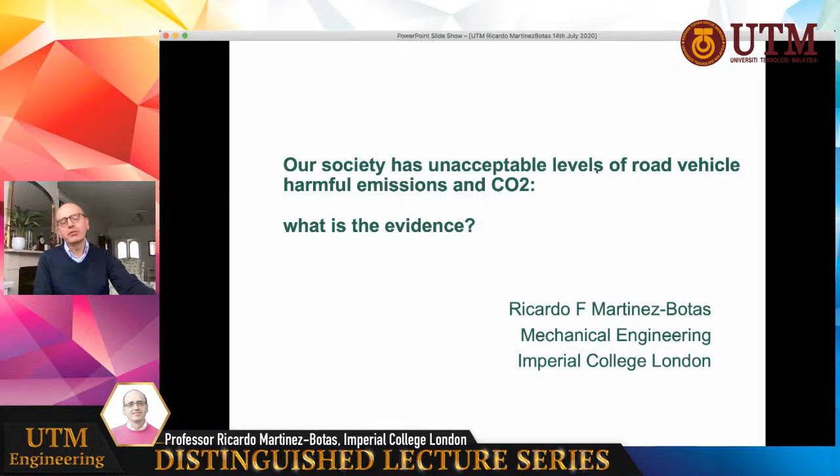And today I chose a topic which is entitled, as the Dean just told us. Really what I want to emphasize is what is the evidence behind our concerns when it comes to vehicle emissions, and what is the actual evidence that can support the policy of governments. That's really the major topic of today. And the topics I'm going to cover here.

I'm going to talk about vehicle emissions as the route to which we got, and where we are in regulations. I'm going to talk about the testing done on our roads in the UK. I was the overseer of the biggest emissions testing in the country, following the Volkswagen aftermath. So I'm going to spend most of my talk about this.

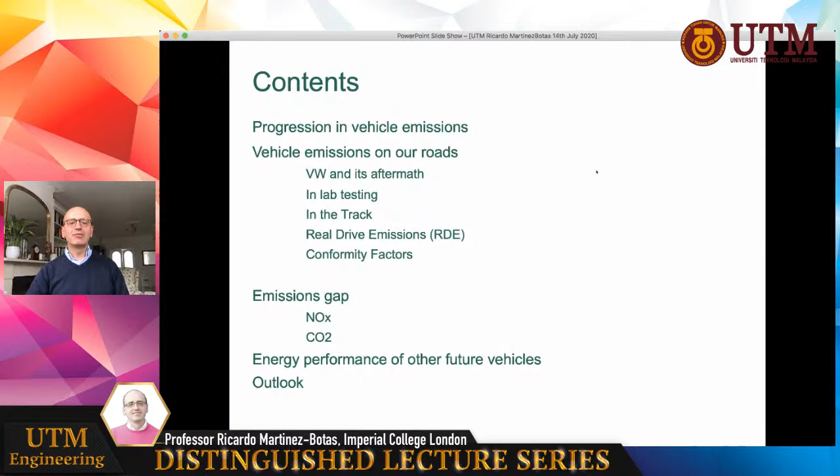I'm going to just show you the evidence. We're all engineers, or most of us are engineers and scientists. Hopefully there'll be some policymakers interested also in what I have to bring up. I'm going to spend most of the time looking at the evidence. Towards the end, I'm going to talk about the emissions gap, the gap between diesel-based NOx emissions as well as CO2 emissions. If time allows, I will look at the future. So this is my talk, and I'm now going to concentrate on two elements, mostly two types of emission levels, a lot about NOx and some about CO2 and contributions to CO2. Much of this translates to gasoline engines as well, and certainly all of it translates to heavy-duty trucks, buses, and other machinery on our roads.

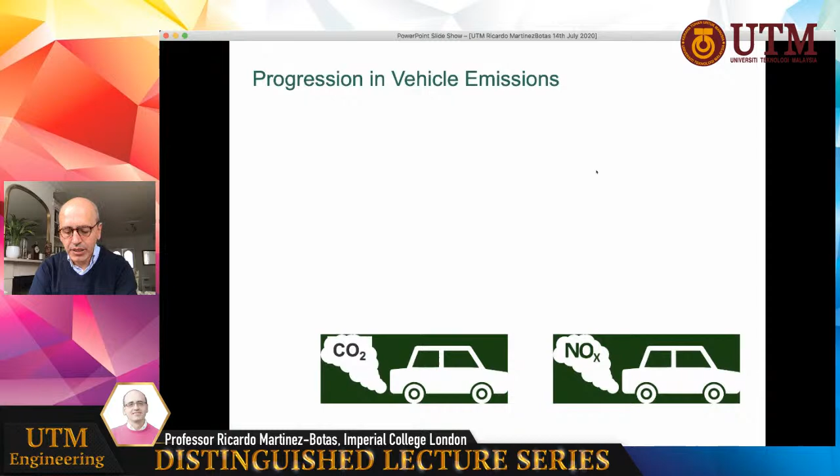So you can see from the UK national statistics of air pollutants, that is the kind of progression. If you start at 1970, we can see a substantial decrease from all emission levels. They're all centered at 100%, 100 units in 1970, and we can see how they project downwards. This is air quality in the country on average, and we can see all the emission levels going down. NOx dropped 69% in that period, from 1970 to 2014. Particulate matter, sulfur dioxide, non-methane organic compounds, ammonia stayed more or less the same. It was never really that high.

And so clearly we've made some effort. We made substantial progress in emission standards. Our air quality has got better, our pollutants have gone down, and mostly this has been provoked by regulation. This is where politicians, regulators, and air quality experts play a role. They play a role in sustaining a decrease that industry resents, because industry has a product to sell, a product to enable, and a customer to satisfy. So our regulations enable them to get better products, and that is costly and time-consuming. And so we see a substantial decrease in all air quality. This is just global air quality in the UK, as published.

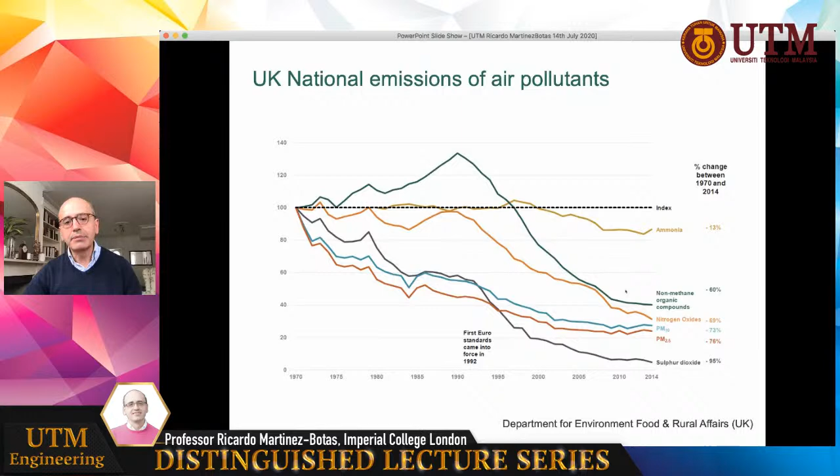If we look at emission standards from vehicles, on the top diesels, on the bottom petrol, we can see the Euro standards have enabled these changes. Just focus on a few of them, particularly NOx. You could focus on the others. From Euro 3, the NOx standard in grams per kilometer was about 0.5, and that's been reducing to get to Euro 6, which is around 0.08 grams of NOx, 80 milligrams per kilometer, and 180 milligrams for Euro 5. Equally, emission standards are of course much lower when it comes to NOx in a gasoline environment, but higher in other matters. So all in all, the standards have forced a change to the industry. We can see ourselves at Euro 5, possibly where Malaysia is sitting; Europe is now at Euro 6A, Euro 6B, now RDE, so even more advanced emission standard reduction systems.

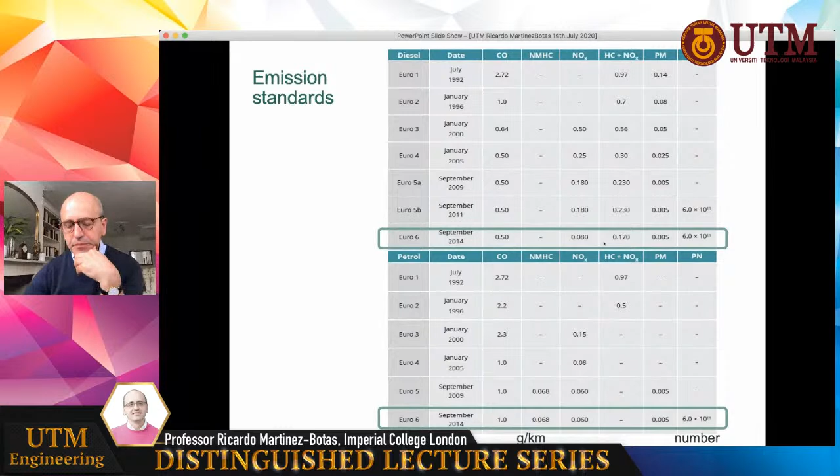If we then perhaps look at the improvements, let's look at the positive side before I tell you about the negative side of our air quality provoked by vehicles. The first one is here: the NOx limit of Euro 6 is 90% lower than 1992. So the reduction from that 1992 emission standard to today is about 90%. If you look at the difference between Euro 6 and Euro 5, Euro 6 is reducing that emission level by 44% relative to Euro 5. So it is worth going from Euro 5 to Euro 6 - it is a very substantial decrease of NOx and other emittents.

Meeting the standards in busy roads remains a huge challenge. In some areas, if you take big conurbations around the world, whether it's Kuala Lumpur or Johor, on a busy day, you would say that vehicle emissions account...

I was explaining how our emission standards have improved over the years, focusing on this 90% reduction of NOx since 1992 with Euro 6, and the difference between Euro 5 and Euro 6 is a 44% improvement. So it's worth going up to Euro 6 because you get a substantial benefit on air quality.

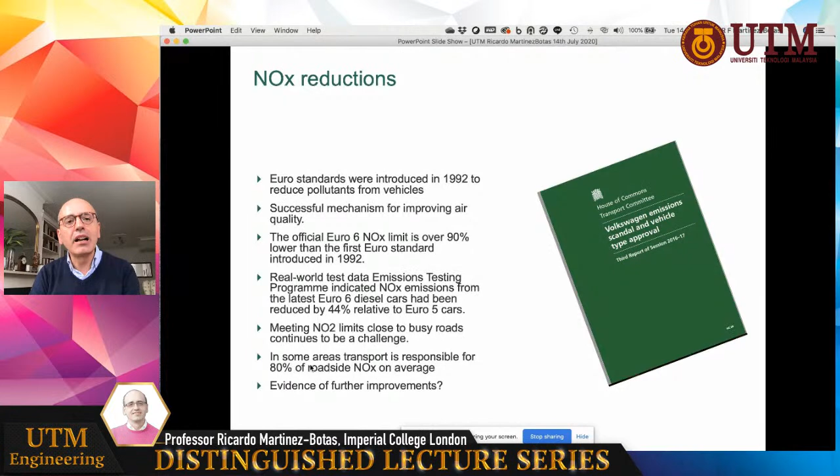Typically 80% of roadside emissions come from vehicles, and the remainder comes from other sources, whether tires, nearby industries, household emission flues, and local industrial sites. But 80% does account for our air quality's vehicle emissions.

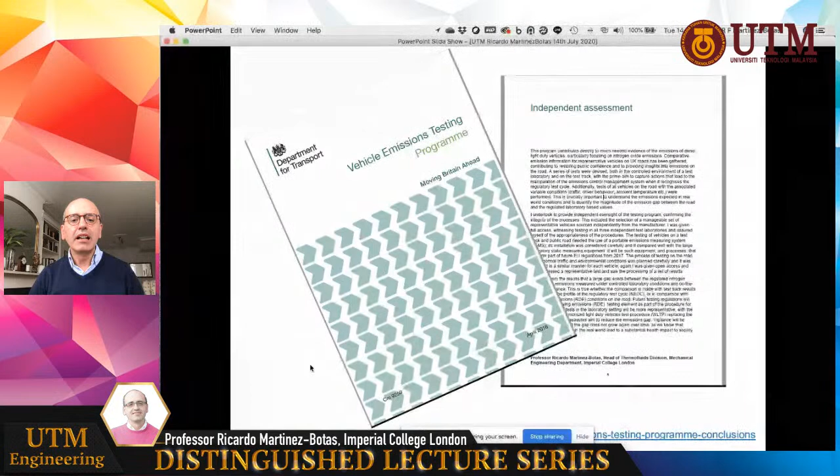With that in mind, we did a testing program and reported to the UK Parliament some years ago. This was the biggest program we've undertaken on vehicle emission testing, a substantial investment, and I was the overseer. I'm going to tell you today about this.

We urgently needed evidence on vehicle emissions. We looked at the world, published data, what we could ascertain, industrial partners and automotive companies, but none of those was sufficiently robust for us to take policy decisions. Whether it's a question of trust or of evidence, the fact is there was no evidence and no trust, and there still remains marginal difficulty in trusting our automotive companies, simply because of the aftermath of the Volkswagen cheating scandal.

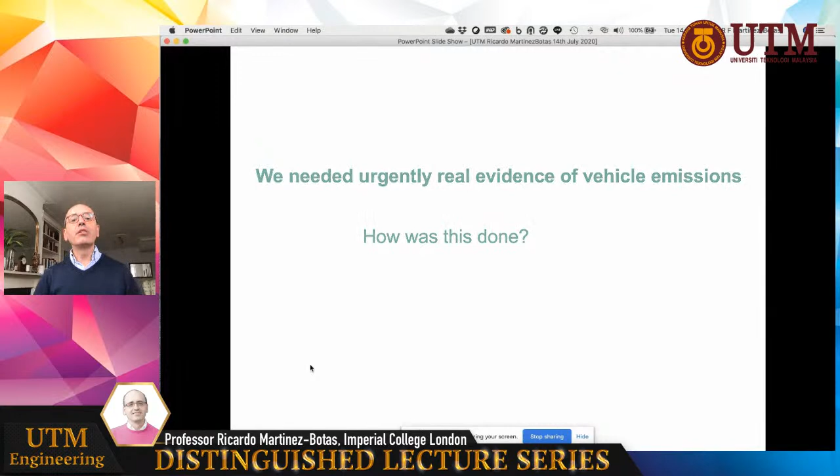So with that in mind, we needed to do something. Today I'm going to report on this and say how we undertook it. We looked at all the top-selling cars, trying to capture 75% of the top 70 vehicles, so we could capture a large proportion of all the vehicles out there.

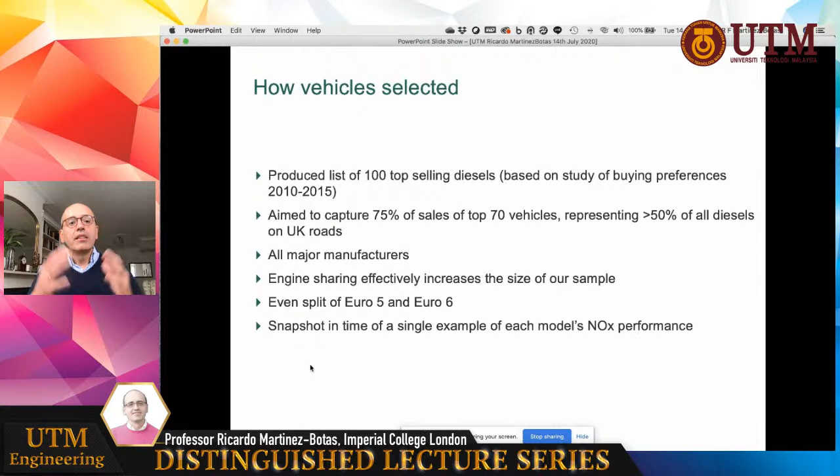For diesel vehicles, we tried to capture all manufacturers that are major sellers in the UK. Where sharing of a vehicle class or engine class was possible, we wouldn't repeat the testing. We had an even split between Euro 5s and Euro 6s, trying to get a snapshot of NOx performance. This major endeavor took the best part of 9 months, many tens of people, and lots of investment by the UK government, to produce a report that confirmed the difficulty in vehicle emissions as we see it today.

This was only a few years ago. I wonder if we did the testing today whether we'd see a substantial difference. I was commenting on how lockdown has changed this - lockdown since the 23rd of March or so in the UK, with a relief of lockdown in the last few weeks, has produced several effects.

The first is I can see the skies a lot bluer here in London - we're not quite in the middle of London, in Twickenham. If you're a rugby fan, you can see the Twickenham Stadium nearby. Second, we can hear the birds a lot more - in fact, they're singing louder than ever. The third thing we see is fewer cars and fewer scents and smells, which is somewhat different.

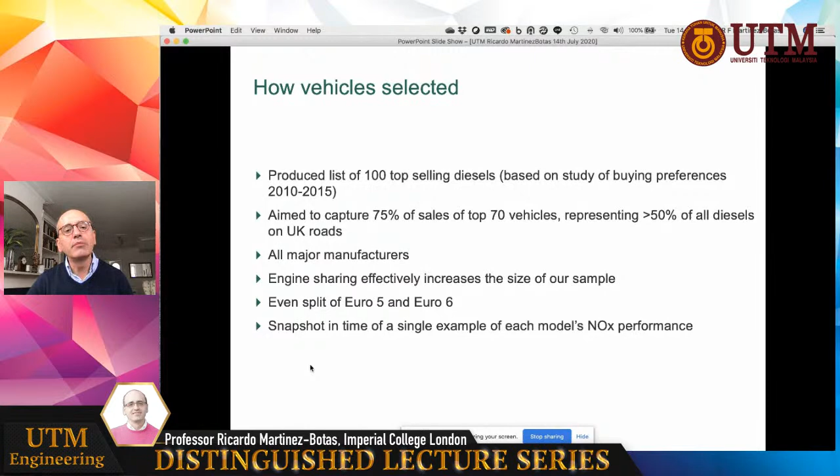Of course, the UK government is measuring standards during those lockdown events, which lasted many weeks. We'll have information showing that during this COVID crisis, the level of air quality in our cities, particularly London, would be at its lowest possible level, as there was minimum movement of vehicles on the roads and an extended period of no significant emissions. One would say that is the minimum standard. We'll see that in the next few weeks as our ministers look into it.

This was our methodology. We didn't want to interfere, intervene, or communicate in any way with the car makers, in case they provided us a car we'd have to question. So we sourced them from car hire fleets, many tens of vehicles, with no modifications or defects. They had to be under 30,000 miles, and we used the same grade of fuel for all. We undertook two tests with two pieces of equipment.

The first one is the standard laboratory-based equipment, which is large equipment, maybe occupying the entire size of my lounge here behind me, and it contains a dynamometer with 4-wheel drive and an investment of many millions of pounds. And that's how we would do the testing normally for certification.

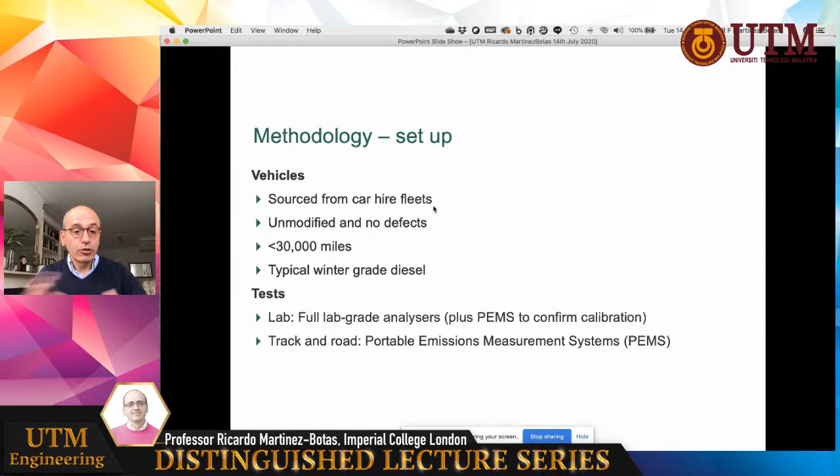The second way of doing it is we hired a PEMS, a portable emissions measurement system, which you will see a figure of in a minute, which we adapted and joined to the exhaust pipe of the vehicles. And then that was carried with the vehicle through the testing. So there were 2 sets of equipment, and the first one was on the dyno.

So this is a vehicle which was from the Volkswagen group, which we put into the standard vehicle certification procedures, and undertook the vehicle certification procedures as given at that time. And here you see on the right-hand side the speed trace needed.

So 0 kilometers per hour, 140 kilometers per hour, and it's the faint gray line, which I'm going to trace with my mouse. This is what the dyno, this equipment, will be doing. It will force an acceleration and deceleration following the gray trace at lower speed, and finally mimic a high-speed drive on a motorway over 1,200 seconds.

That is basically how the test was done up to that point. A car will be taken into the lab, will undertake this sort of testing in a certification manner with an independent overseer, and they will say, yeah, it meets the standard.

So here is meeting the standard for NOx, the red line, or rather orange-looking line, quite low because it's low speed. And when it gets to the spiking, or rather higher speed trace, 100 to 120 kilometers an hour, motorway mimicking, there will be a bigger NOx impact.

What we did is we simply took the vehicle and then slightly modified the testing by putting the high-speed element, the fast element, ahead of the slow element. So we just modified our testing procedure and said, right, let me take the lower speed later, and let me take the high speed earlier.

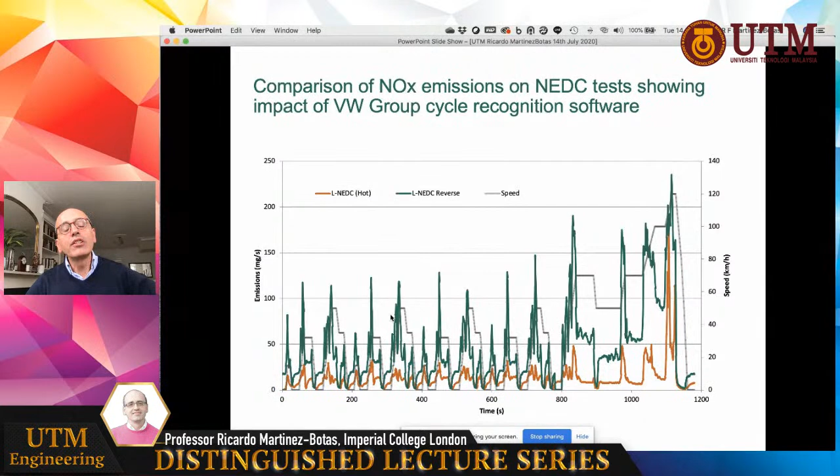Okay, one can argue endlessly over this matter. So then we said, right, if we now take a different Volkswagen Group vehicle which does not have the recognition software, well indeed, it doesn't make a difference whether you go forward or backwards. Green and orange are approximately the same, rather low.

So that, of course, told us that there were vehicles out there that would be cheating. Now, the question was, relevant to our seminar today, whether there was any other vehicle testing that we tested with similar software recognition in it. And there weren't any. Of all the plethora of vehicles we tested, there were none.

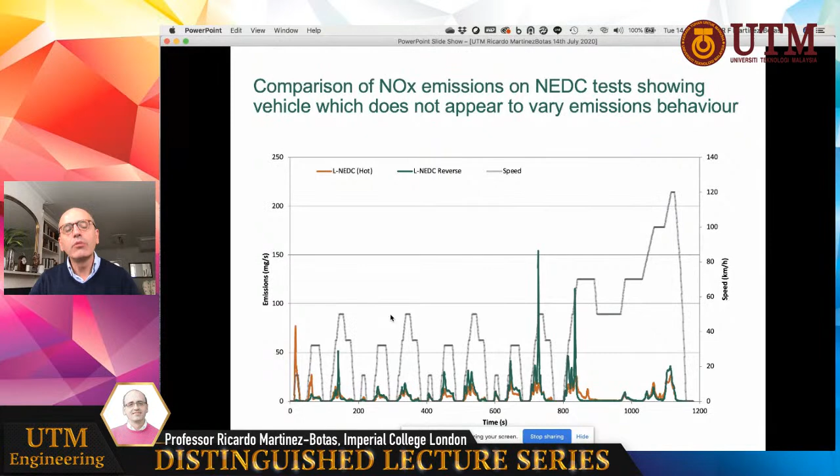So we leave Volkswagen to one side for now. We did our job. Our job continued because, of course, we wanted to know what is the real level of emissions, what is the public exposed to. Why I say our cities, our environment is not a good place yet, and why we're having such enormous pressure to electrify, to get rid of, to remove, make obsolete our internal combustion engines.

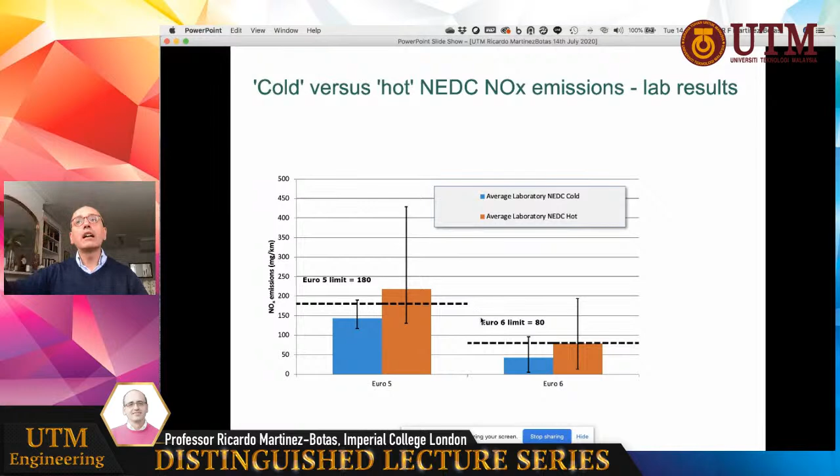When we look at taking those vehicles on the road, a different thing emerges. Before we do that, let's do another experiment. This is a second experiment we undertook. We said, right, let's get our portable emission testing procedure, put this piece of equipment on the vehicle, connect it to the tailpipe, and now undertake the same cycle we undertake in the laboratory with dynamometers and rollers moving the vehicle, but we're going to do it outdoors.

We're going to go to MIRA, a beautiful place in the UK, a beautiful track, mostly done for sports as well as certification, and take the vehicle around the track following precisely this schedule. For 100 seconds we're ramping up in acceleration to about 50 kilometers an hour, and so on and so forth.

I witnessed this, and there was a highly experienced driver following a digital meter, accelerating and decelerating with some precision, almost total precision, to this schedule. Now you would ask, should there be a difference between outdoor and indoor testing? Well, there is some difference because there's an environment around you which is different, some cornering happening on the track, not a lot because you can see those straights. There could be some additional reasons, but in principle there should be no fundamental difference.

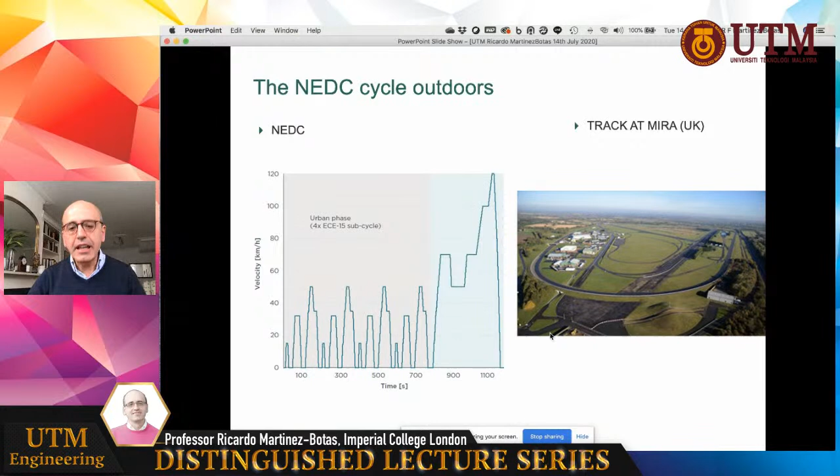And yet when we did the testing, we found this, and we're going to drill down a little bit more. We found that on average, the average emission was by no means anywhere near the emission average here in orange compared to green, whether it's Euro 5 or Euro 6. So the average on the lab and the average on the track were massively different.

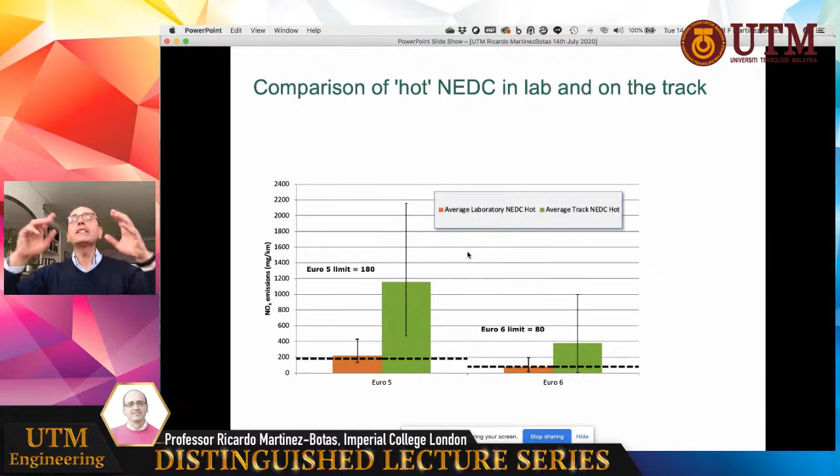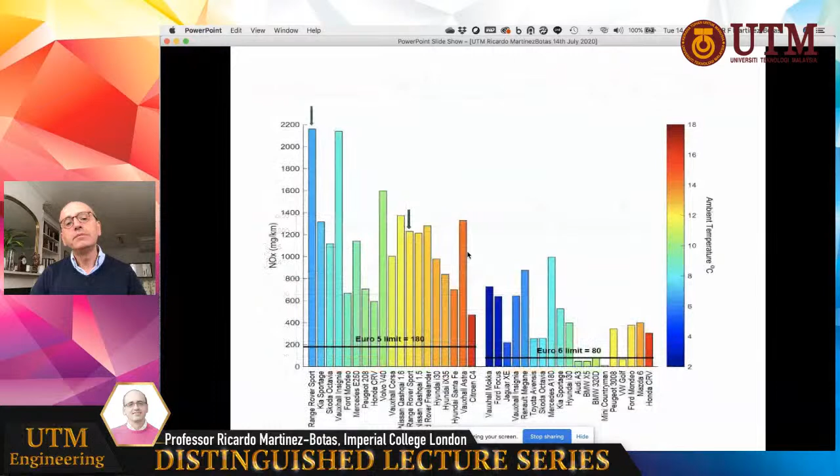Now, if you look at it as an automotive engineer, you'd say I'm undertaking the same trace, the same similar situation, and yet I'm experiencing something a lot bigger on average. Specifically, if you look at specific vehicle classes, the standard they all met on the lab was 180, slightly below, but when it's hot, maybe around 200, when the engine was hot and it was properly done with a fair-to-fair comparison, or 80.

There are no vehicles on Euro 5 that meet that standard. There's some vehicles in Euro 6 that did meet it. They're all well above, and some are at 2,200 - the Range Rover Sport, a previous version to the current Range Rover, it's got better, I must say. Look at that level, or the Vauxhall Insignia, which should be meeting around 180. And the Vauxhall Astra and the Citroën.

Well, I don't want to pick any manufacturer, although I am doing that because it's public domain. And then another Range Rover - two Range Rovers performing rather differently. There is an effect of temperature here in this bar chart. Without paying much attention, there is a bar chart indicating whether it's hot or cold.

Generally, the colder the day, around 6-7 degrees in winter, or the hotter day closer to 15 degrees, there was some effect of air temperature. So it appears the engine system knows air temperature, and it would adapt the exhaust gas recirculation system, the EGR, to adapt and stop it.

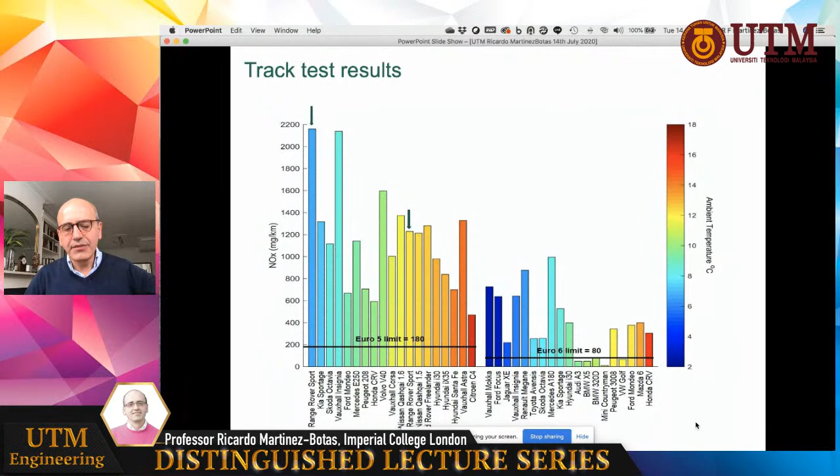The moment the EGR is switched off, vehicle emissions will go substantially higher. So why would there be such a massive difference between what was similar testing? It's unclear to some extent. What I can tell you is here is the equipment, the big laboratory equipment, where they connect the tailpipe to an analyzer.

It's several cabinets big, and millions of pounds. Here is the PEM system connected to the back of the car with a tailpipe, and then an exhaust will be here. It's all done equally, to be fair. Trust me, this was done properly for many tens of vehicles.

And this is the track. Well, first of all, the car on the track has an aerodynamic effect that is not as visible in the dyno. The dyno does know the aerodynamics because it has a CD, a coefficient of drag, that sets the dyno wheels to be mimicking. But there is some effect.

I think when testing, often vehicle developers have used the concept of flexibility. They've used the most favorable condition, and maybe it is the most favorable condition of those coefficients, and therefore the best outcome. The test temperature was different, I mentioned. The weight is slightly different, cornering is slightly different, and there may be some slight difference between the emission equipment. In fact, equipment was compared back to back. It was pretty good. So I think, in fairness, aerodynamics and flexibility are the two biggest differences.

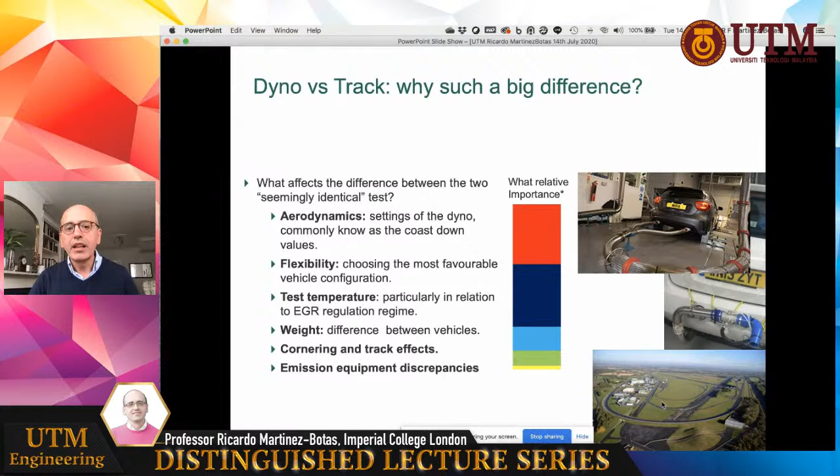So we then wanted to do representative testing. This is a bit like a story. The story says we're going to do real drive emissions. We're going to take the car. Here is the Fabia Skoda TDI, and we'll take all the tens of vehicles, in the real environment, not a test track. This is near Nuneaton in England, and we took the cars.

I only witnessed it, I think, twice, and we did a whole journey, which I'm just imagining by that trace. That journey was 1.5 hours of continuous driving, with real environments including traffic, pedestrians, traffic lights, high speed on the motorway with joining lanes and other vehicles. It included the prescribed urban, rural, and motorway portions, about a third and a third and a third, not far off. And it reverted back to Nuneaton, where the system was checked and disassembled, ready for the next vehicle, and that was done for each and every one of those vehicles.

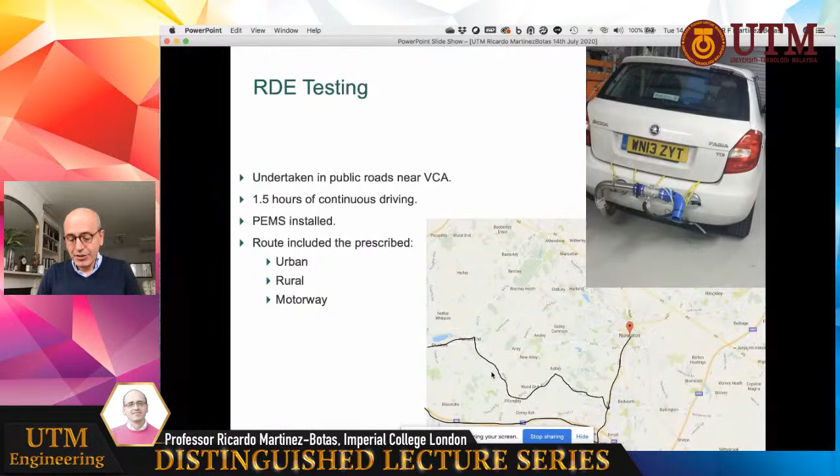And so that is the closest you could say one can come to real life, right? So if it's the closest we can come to real life, what was the outcome? Let's take Euro 5. Euro 5 is similar to Malaysia, so you shouldn't be terribly happy with your own vehicle levels, because I think they're substantially higher than they should be. When undertaken for all these vehicles, and the names and models are there, well, if the standard was about 180-200, the average on the road was bordering 1,200 milligrams per kilometer.

And all the other emissions will follow. So in other words, no matter which one, some are massively higher. I already mentioned the Insignia, Range Rover Sport, and a few others, Hyundai Santa Fe, there's a few others. And some rather good ones, you could say the Citroën C4, Peugeot 208, and some rather good ones and not so good ones. No matter what, 1,150 milligrams per kilometer, that is the average emission over a 1.5 hour drive.

And what is the point of regulating for 180? There is a point, because the next slide will show you why there is a point of tightening it. If you look at the Euro 5, Euro 6s, these are most relevant to us. Do remember that most of these vehicles are still on the road. Do remember that it takes about 10 years or so, depending on the nation, to have a substantial turnover of vehicles. So no matter what, these vehicles are today on the road.

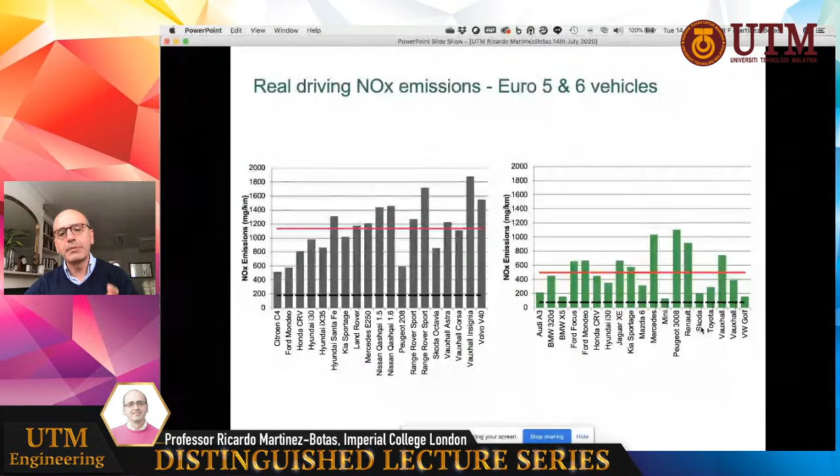This is better visualized by the next graph, which is rather complex - I've only taken Euro 6s here. What I've done is taken the ratio of what they delivered on the road to what they should have delivered, or rather what was regulated in the test environment in the lab. So where number one is parity - any vehicle that makes 1 means it's emitting 80.

This is how Euro 6b, Euro 7 will be saying we want to develop a conformity factor, a CF, and we set a number. You can see that if we were to apply any conformity factor to these vehicles, only 3 meet anything less than 2.1 - 2.1 being a possible number. The BMW X5, the Mini Countryman, and the Volkswagen Golf. The others are not just 3, 4, 5, 6, 7, but 10, 12, 13, 14 times what they should be. The average conformity factor of these super advanced Euro 6 vehicles is 6.2. And that is the evidence we needed to say we are not getting to the standards we would like our nations to be.

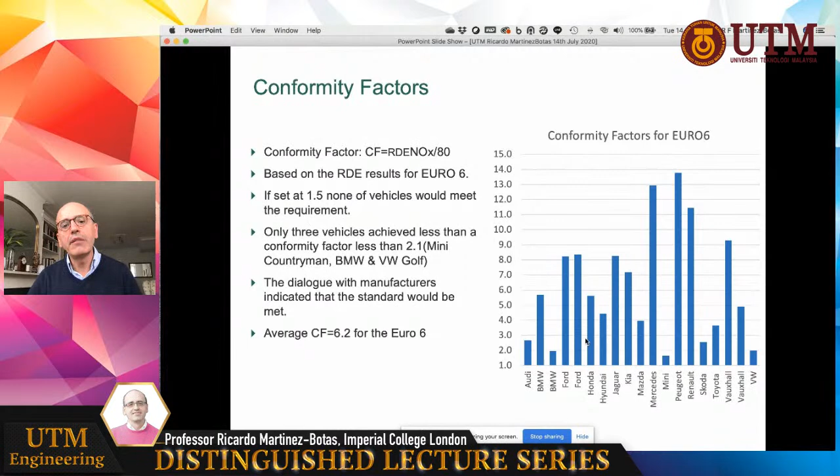So the evidence is astoundingly bad.

The interesting thing about this - I made a plot here as I come towards the latter part of the presentation, conscious of time - is that we did something rather naughty. We plotted together the real drive for all these vehicles versus the simulated track following a very, very tight prescribed speed trace. And these are very different things.

On the track, you're prescribing without traffic, without pedestrians, without traffic lights - a very precise, very tight testing procedure. On the road, you have the day change from morning to evening, though it's usually done midday - we did it at midday. There's also traffic, traffic lights, pedestrians, acceleration and deceleration, and the ability to just drive, because they're all different drivers.

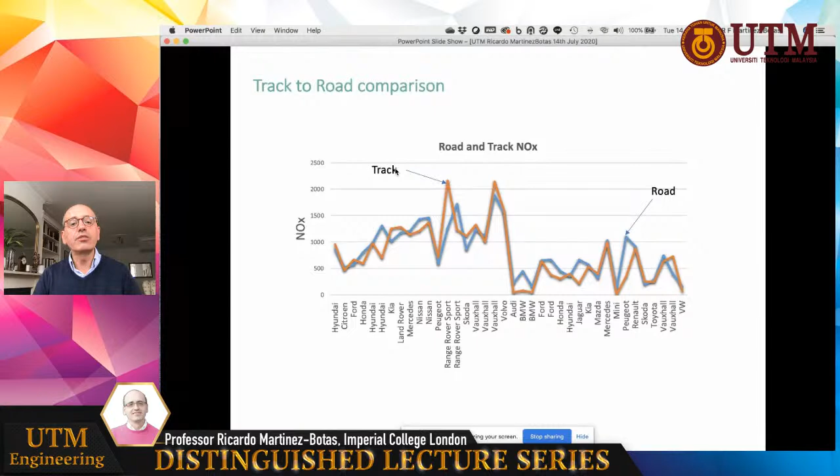Now, there'd be absolutely no reason why these two should be correlated, and yet the evidence shows the strongest correlation. So clearly, the way our diesel technology is enabled is not capturing the reality of emission levels. Whether you do a very narrow, tightly controlled test on the track, or you do 1.5 hours with real traffic, the numbers come up almost the same, which is rather shocking. This is to do with the way the emission equipment is enabled.

Now, in some cases yes, in some cases no. And the evidence is strong for the latter than the former. The evidence is strong to say that observation I had a minute ago is not in line, and is not in line in magnitude with what needs to be done to protect it.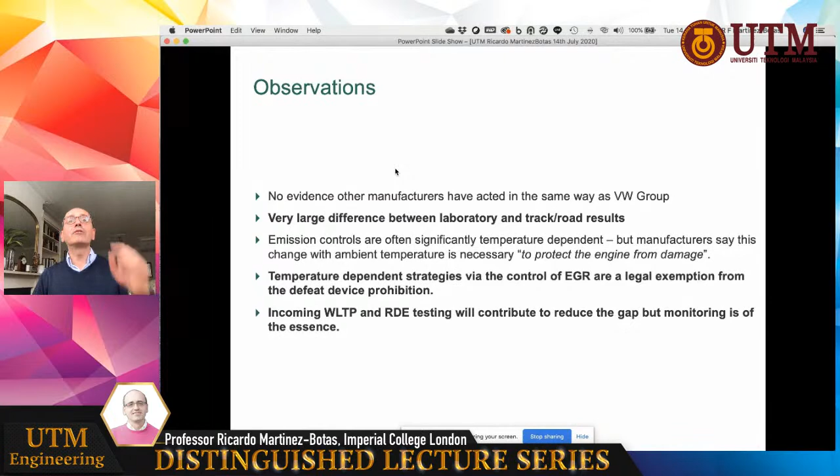The last part of my talk, as I come towards the end, is to discuss the emissions gap. The emissions gap is to do with the following: if we have a technology through which we improve it, and in that improvement we get our emissions lower, is it possible, or is there any evidence that emission levels in real life get worse? In other words, you regulate something which is in a tight environment of testing conditions. Does that mean you might increase or decrease your outdoor real drive emission output?

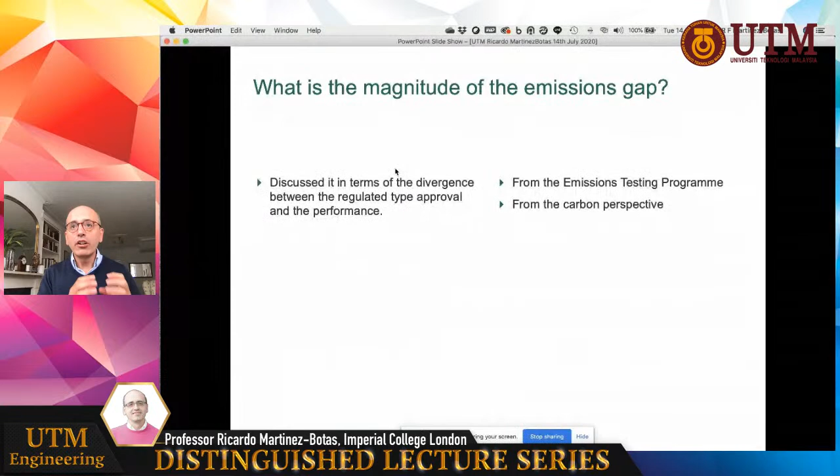You would say that if you regulate something to lower emissions, you should be able to lower also the level of emissions on the road. So divergence will mean that while you get a benefit in a tight testing environment, you're not getting the equivalent benefit in real life, if it's a divergence in the negative sense.

So there has been some divergence, and we better acknowledge that. We got better, everything is better, but the divergence relative to what we should be meeting, which is a better standard, on the road has increased.

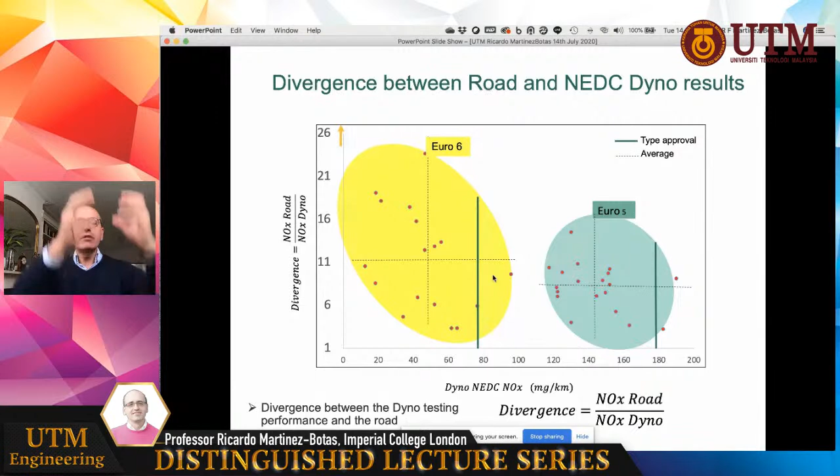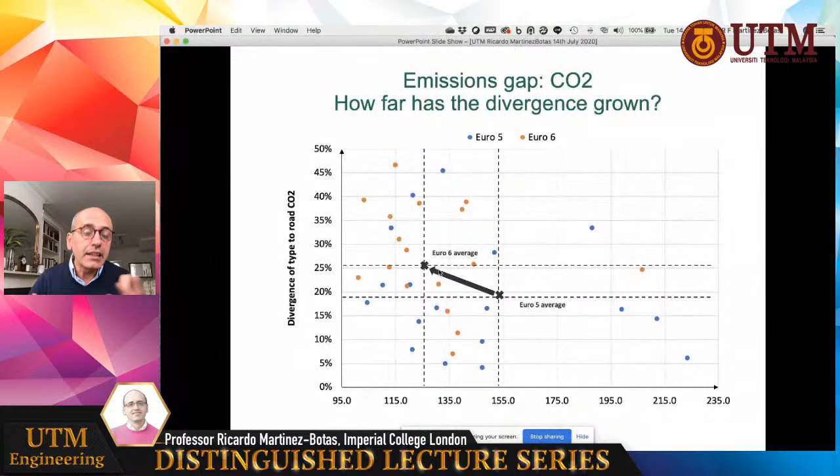If we take 'should have' as a strong word, which is not legally binding - so you could say there is a divergence, because the Euro 5s diverge in the real environment relative to the lab around 19%, while they got better on average, Euro 6 now diverges 25%, and some a lot more. So there is an effect of divergence - our vehicles, while getting better in one aspect, maybe are not getting better in other aspects. CO2 being one where there is some evidence of divergence, which is not just coming from me.

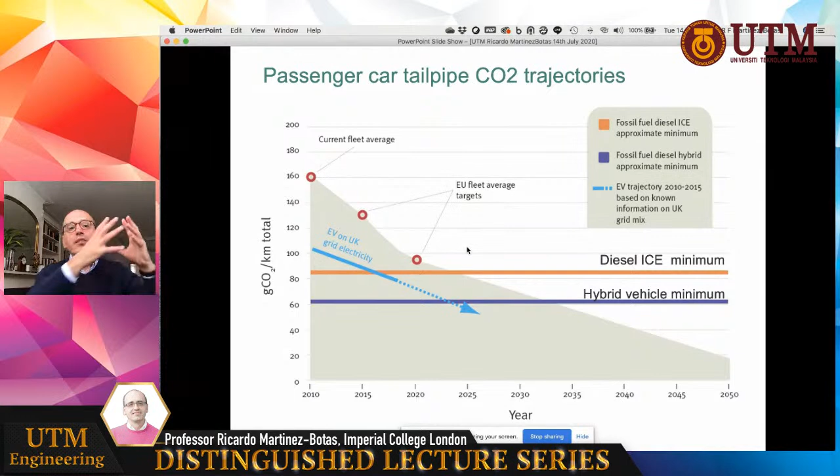So no wonder we're thinking we've got to do lots of electrification. Hand in hand with our electrification, we need to see the grid decarbonization continue, that blue line continuing to net zero. So you see many drivers: the electricity network has to lower to net zero, and the fleet will have to go outside direct drive and outside hybrids if it's going to meet zero.

Additionally, we could have the option of a net zero carbon fuel, sustainably derived from the environment and produced so that we have a net zero emission using still fuels, of course, so long as air quality is kept to a good level.

So many things are pulling our society: needing to decarbonize, needing better air quality, needing fuels with net zero carbon, getting to a standard not purely driven by electric vehicles but maybe hybrid electric vehicles. So many things are pulling us in this trajectory.

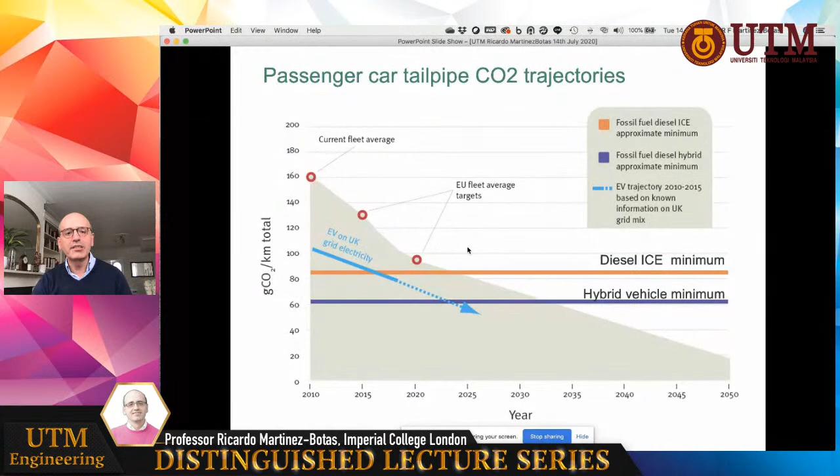I think with this I finish. Apologies, I had a few minutes where I stepped out thanks to the internet, but hopefully we didn't waste too much time. With that, Rafiq, I finished my talk.